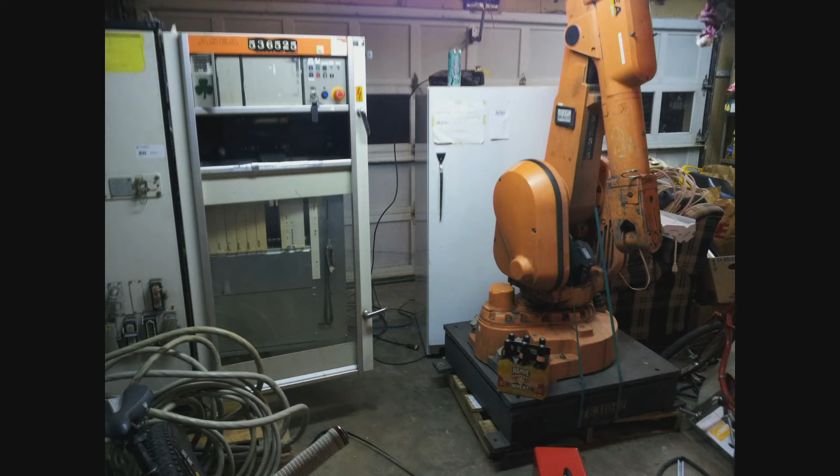So then on Valentine's Day, my welcome had officially been worn out at the plumbing company for having these giant robots sitting in the corner. So I rented a box truck with a lift gate on it and rented a pallet jack so I could roll this thing into my garage. And I started taking it apart. I was trying to figure out how it worked, what it was, what this crazy piece of machinery did.

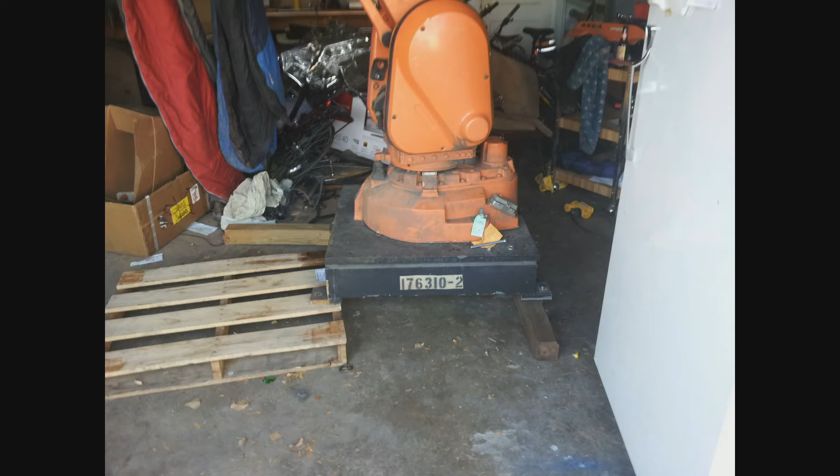And then I also had to try to figure out a way to get it off the pallet, using only the tools that I could afford at this point. And a bit of luck. So you can see there's actually a third one here. This is right before I slid it off the pallet and slid a bolt through and hoped it wouldn't fall down. And this was the celebratory beer and the pallet that had landed.

And you can actually see there's concrete dust around the corners from where loosening these bolts were slowly drilling into the concrete. Quick side note, that base is 1-inch thick plate steel. So the robot itself weighs 700 pounds. The base was easily another couple hundred.

So now that the robots were grounded, I was trying to figure out what to feed these things. What do robots eat? These robots eat 3-phase power. The City of Fort Collins wouldn't run 3-phase power to a garage. And even if they could, I wouldn't have been able to afford the installation cost. And so just like normal power lines, the three-phase power in my neighborhood was just out of reach. But it turns out you can fake it.

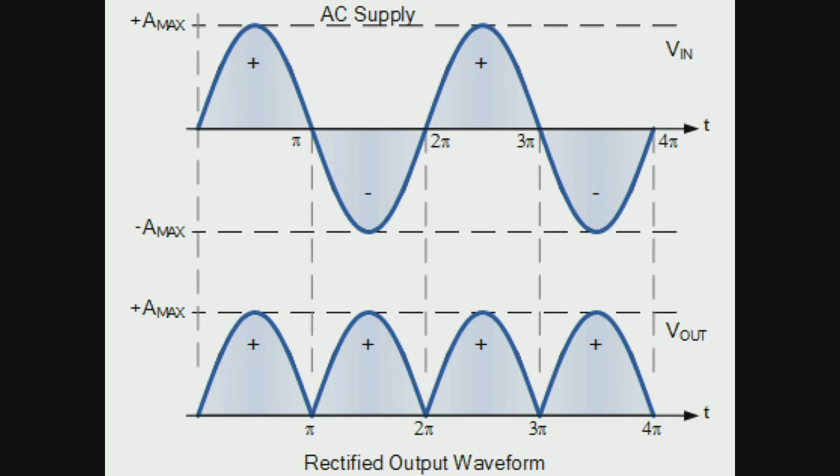But why would you want to? So if you look at the sine wave here, what you're seeing is standard AC line voltage from the wall, right? So if you're trying to operate a piece of big, heavy machinery, those zero cross points kill you, because at the point where the sine wave crosses the zero mark, you have no power available. So what that means is that if you wanted to run this kind of robot on single-phase power, you would need a tremendous amount of capacitive storage to get you through that dip.

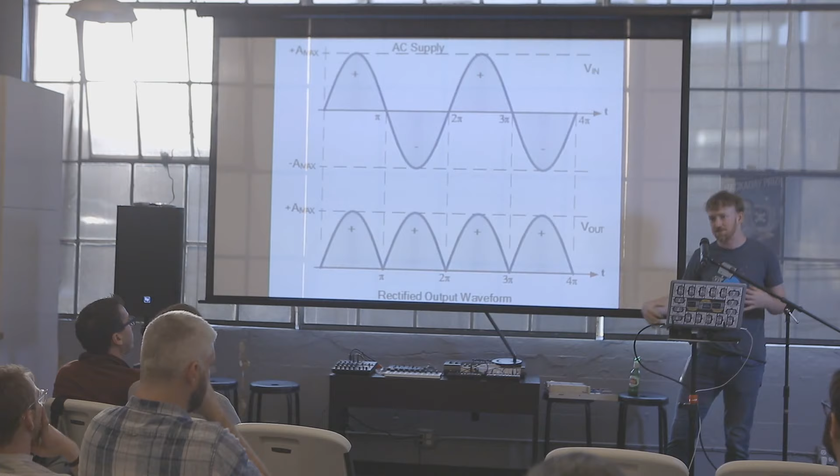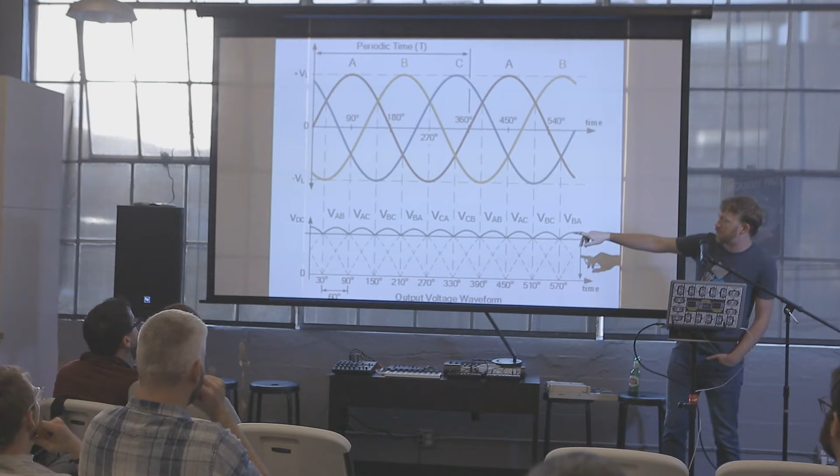So if you wanted any power in these moments, and the robot could move at any time and draws a ton of power as it does, you need something to get you through that lull. Three-phase power gets around this, because if you look at the full-wave rectified three-phase waveform, you can see that there's always power available to you. So this means that the controller needs less capacitive storage, and capacitors are crazy expensive, and they go bad.

So then I sold my motorcycle, my last frivolous asset, and drained the last pennies from my savings to buy a rotary phase converter. So a rotary phase converter, you send in single phase power basically into a three-phase motor. This is a terrible thing to do. This three-phase motor is about 7.5 horsepower. It takes 10 amps to run it. And so you are just burning energy turning this thing with like a gnarly waveform.

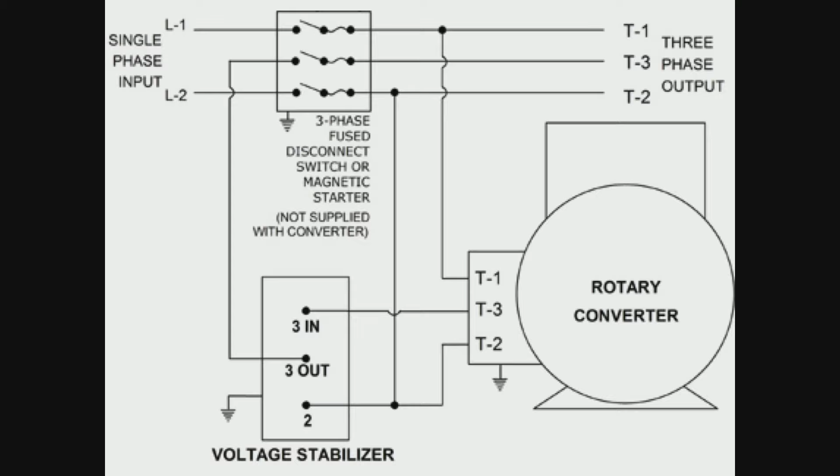But the idea is that you get this idler generator. So if you're trying to draw power during those lulls, you can actually pull off the rotor inertia a bit like a generator. And this lets you get through those momentary dips. So then I built a little contactor box. This is a very dark photo.

And now I had three-phase 220 in my garage, which was great because inside the robot, there was this giant transformer that had a ton of taps, like 30 taps across the top. So what are the odds that there's not a tap that I can run 220 into this thing? And even though the nameplate on the robot says it runs on 475, I thought I'd be able to swing it. So I did what any reasonable person would do, and I called the 24-hour ABB hotline.

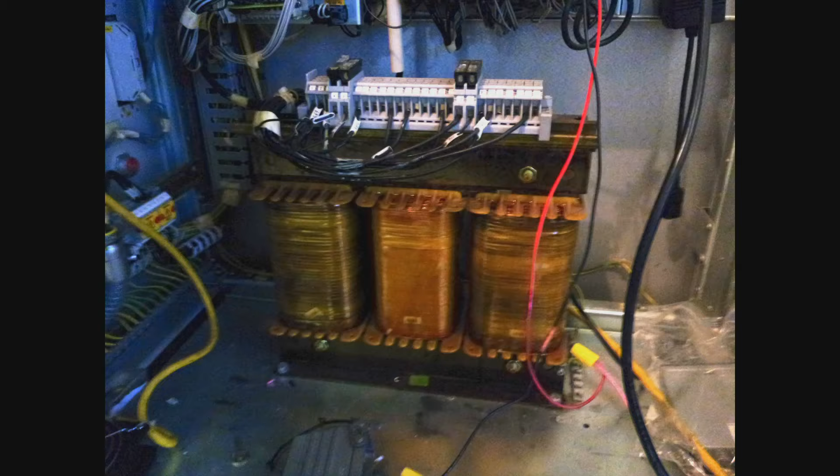I told the poor on-call engineer on the other end that I needed to move this robot across the factory, and someone had disconnected it, and I didn't know where the taps were, and I needed to get this thing back online. And he's like, okay, hold on, let me go dig some of the old manuals out of storage, because this robot's from 1987. So they're not used to getting these calls. And he called me back with some bad news.

All of these taps are designed to take in anywhere from 400 volts AC to 600 volts AC three-phase. And a step-up transformer for three-phase is really expensive, like $500 to $1,000 used in an unsure state. But luckily, there are salvage wreckers in the world who are heroes. There was an amazing toothless guy 3 hours away who had found this, which I give him credit for, because had you found this and survived, that means that it was probably on a building that wasn't powered. I paid $75 for this.

Him and his buddy helped me load it into the back of my Honda Civic, and it took about a couple days for my friends to come home. They were out of town at the time, and I couldn't get it out of the trunk on my own. So this is a 9 kVA transformer; the high voltage side is 480, low voltage side is 208. But one of the wonderful things about transformers is you run them forward, you run them backward. So I put in 220, I got about 470 out.

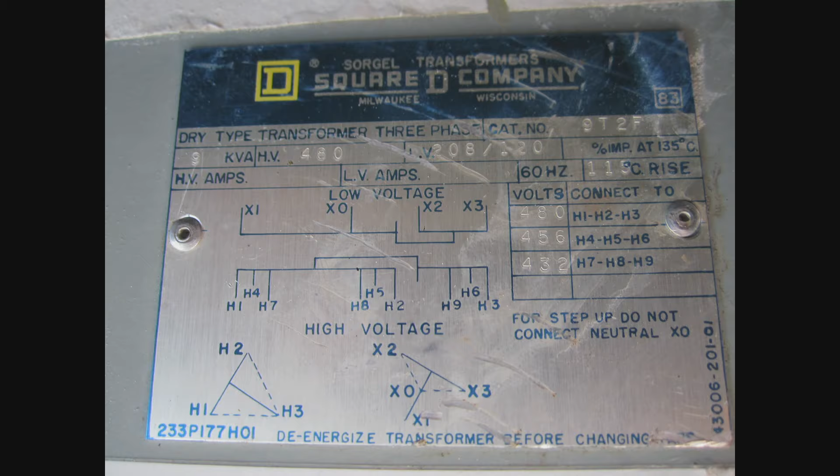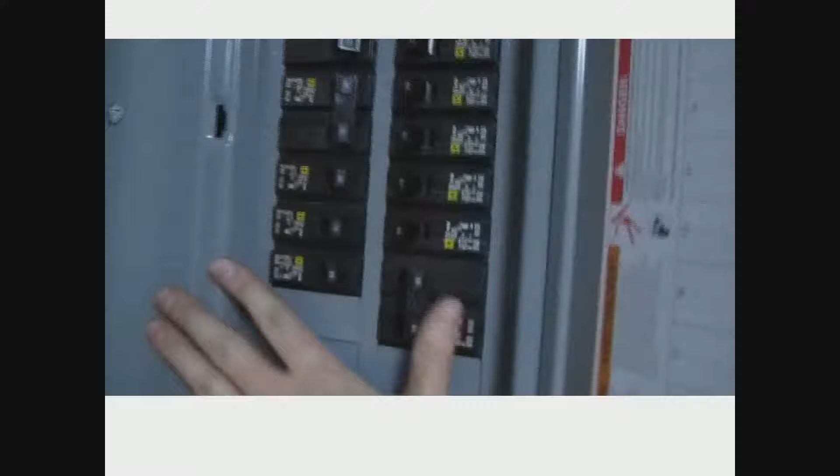So then with everything in place, we threw the breaker. Oh, wait. Oops, sorry. Light on, phase converter. Up to speed, sounds good.

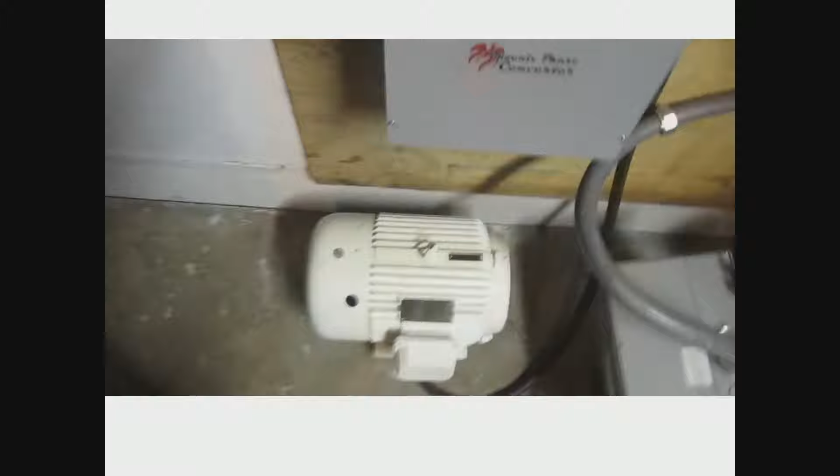Transformer activated. Dun, dun, dun, dun, dun, dun.

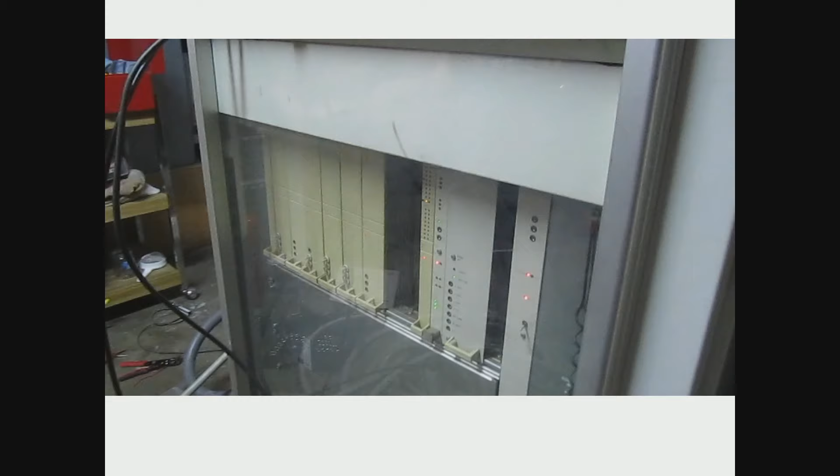Oh, we have lights. Yeah. Oh, shit. Oh, sorry, I was swearing on the radio. Okay, yeah, sorry about the shakiness. I was very excited. I was also like terrified.

And then this was the first message from the robot. So it took almost a year, and it said 510 system error right after that, which meant that there was an issue with a 300-volt supply. So great, we had all the power up, we turned it on. Turns out when people sell things in unknown condition, it can be pretty bad. So the power board needed some love.

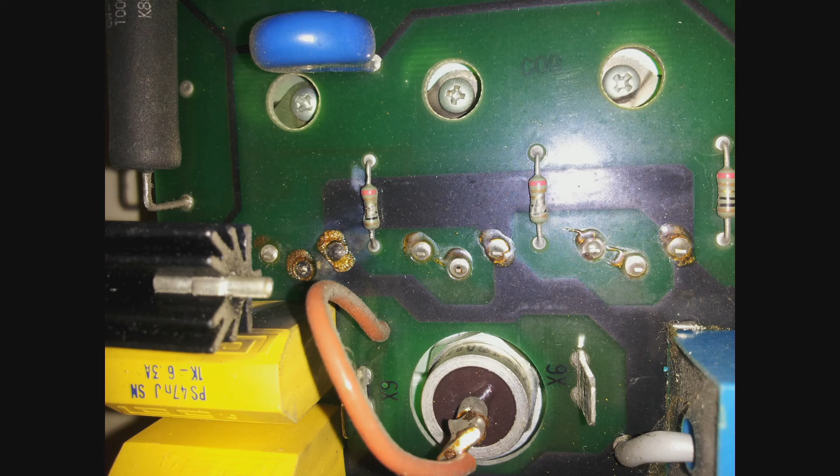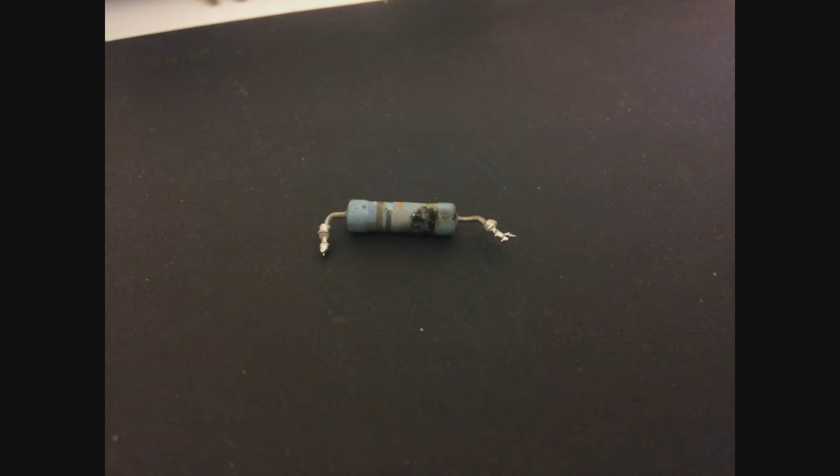You can see that on the right, there's a component that's just totally missing. There were some legs fried off of other things. Some capacitors. It's sort of hard to see in here, but this is just blackened on the left-hand side. This resistor had a hole physically blown through it, which is pretty cool. So then I just removed a bunch of the monster components, just testing things as you do.

Some of the big capacitors, these are the size of a pint glass. And you can see around the negative terminal there's some corrosion from where the electrolyte may have leaked out. So put a little 1K resistor on it. I should say at this point in time, my only piece of test equipment was a Harbor Freight multimeter.

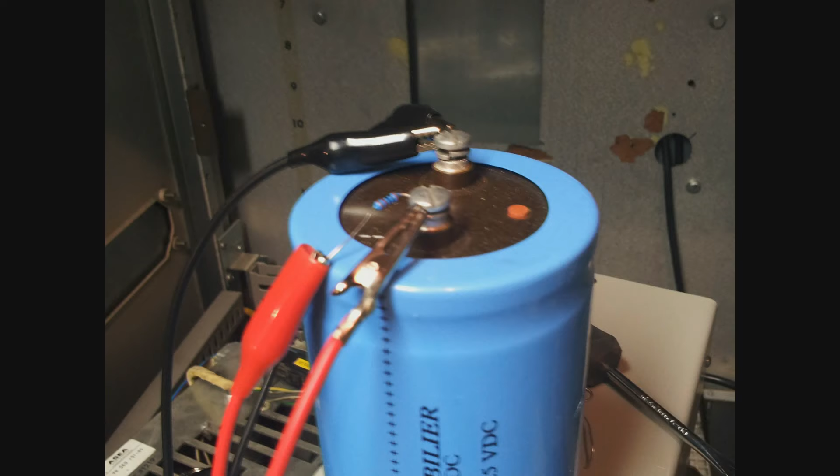So to test a 350 volt, 3,300 microfarad cap, it needed just a little RC circuit. So yeah, I just used a multimeter and a stopwatch. Turns out all the caps were fine, as far as I can measure. So then rebuilt the board, put it all back together, and then it was time to fire it up again.

I just heard a sound from... That was a huge pop. I saw a spark. So when we fired it up for the first time, got a little bit of an arc flash inside the cabinet. And a new message from the robot, 506 servo error 2.

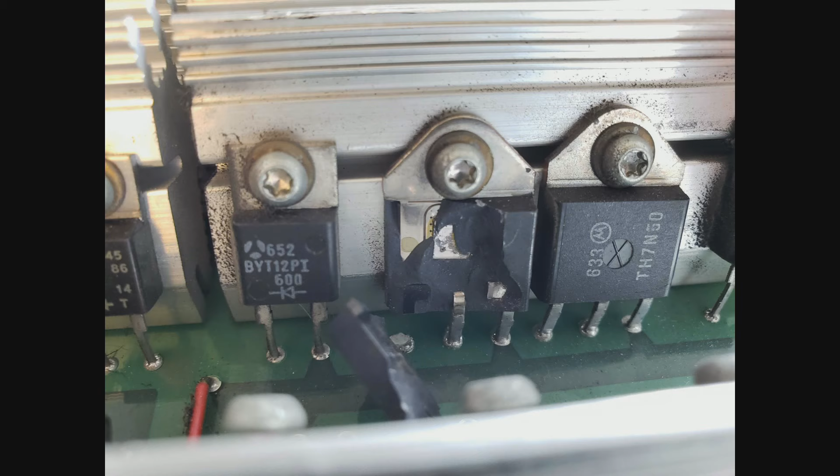A couple of the transistors had physically blown themselves apart. This is a 500 volt, 7 amp continuous, 40 amp peak transistor that had blown itself in half. And you can actually see it. You can pass around some pieces of cool robot brain.

Yeah. What's cool is on the back of that board, too, you can see there's this channel, sort of like on Mars, so you can see where the rivers used to be. You can see where one of the copper traces were. And it actually deposited this fine copper spray paint on the board behind it.

I also promised to talk about transistor matching. One of the cool things is that, in 1987, these high-power transistors are extremely expensive. So they did a lot of binning to actually match transistors. And so you can see that these guys are actually in parallel. And as you look at that board, you can see everything is like a matched set.

So whenever you're doing transistor matching, that little half micro ohm difference between 2 transistors can make a huge difference as one is heating up faster than the other, which is actually why you can see one of these is just fine and the other one had a really bad day. I also built a transistor matching spreadsheet as part of all this, so if anyone wants to check that out, you can send me an email, I'll send it over.

So I realized at this point that Fred wasn't going to move anytime soon. Actually, if you look at that board carefully on the top, there's a big Sharpie X on it, and I didn't put that on there. So this robot sold in unknown condition may have been a bit bad.

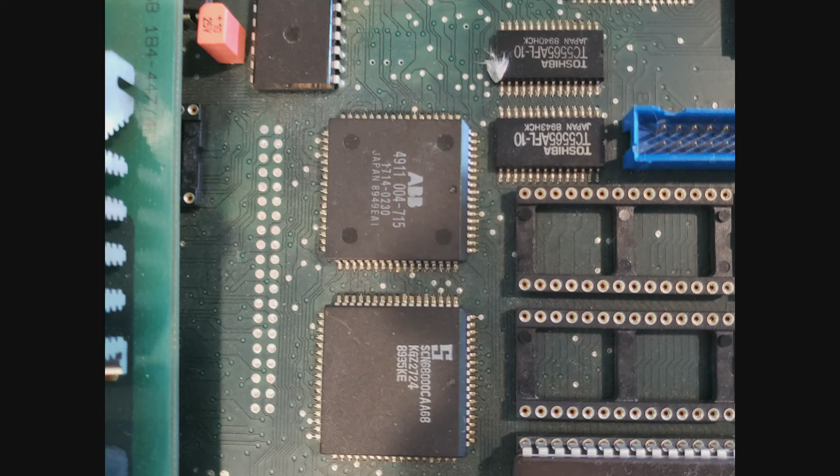So Fred is also filled with ASICs. So I'm going to pass this around. This is Fred's brain. This is the main processor board for the robot. So what? Oh yeah, 1987. Yeah. That was the controller. I'm not sure if anything on that had been upgraded since then.

So there's a few people in the Hackaday community who decap and figure out how ASICs work, the amazing Tamagotchi work. But I'm not that person. And I was very worried that I would go and spend a couple $100 fixing the transistors on this board and then blow an ASIC and never be able to get it moving again.

So with Fred just kind of standing guard over the bicycles in the garage, I kind of did what any sane person would do in this situation. And I rented an engine hoist, turns out the right tool for the job here. And I also rented a truck, and I acquired another robot.

And moved into a warehouse in the industrial part of town. I called it the warehome, which was great because my neighbors had forklifts now, and they were more than happy to let me borrow them to move these weird robots around.

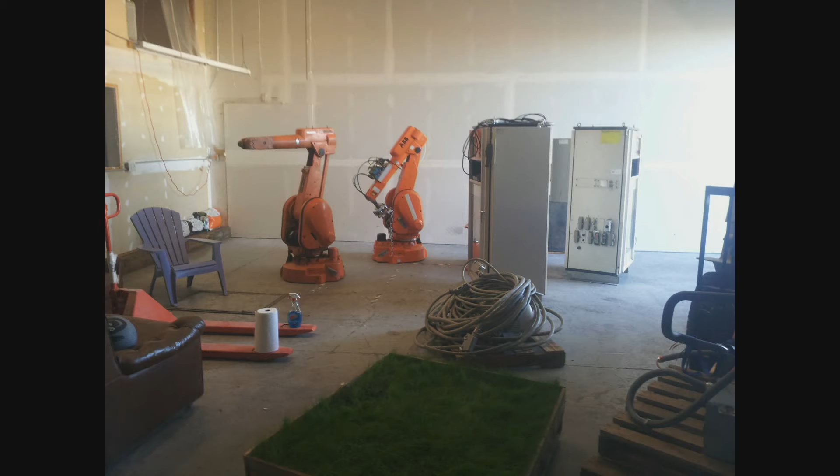I also made like a little bit of grass. It's kind of hard to see in this photo, but you know, there were no windows in here, so I thought a little patch of grass would be nice. And so that was the robots in their new environment.

And the other thing was, during this time, renting a warehouse was pretty expensive, even though it was out in the industrial part of town. So I sublet the space next to the robots to some friends of ours who were starting a food truck that sold sausages. So during this period of my life, I didn't go camping because everything in my life smelled like sausage.

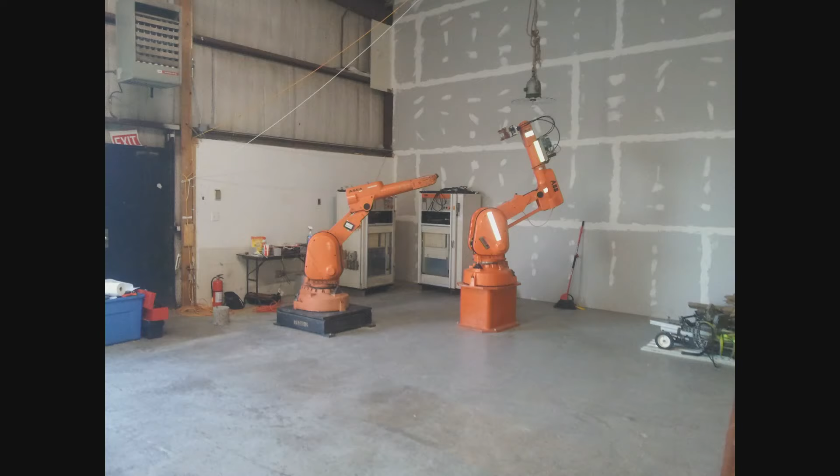So this was me bolting the robots into the concrete. I also got the landlord to pull a 100-amp service of 220 into the corner. And then, yeah, this was measuring it out and landing them. And then this was them actually planted into the ground. So, like, economies of scale, I think, come to mind, but I'm not sure what that means.

So LEFTY is this newer robot here. LEFTY is from a Kodak packaging facility where they used to handle X-ray film, and so it's like brand new. It was in a clean room for most of its life. Its controller cabinet smelled like a new radio. And then Fred was pockmarked from welding and just totally beat up. He spent his life at a Pratt & Whitney jet engine manufacturing facility welding.

So at this point, I was like, okay, I'm probably not going to get these controllers working again. So I started to try to figure out how they actually work. And I was realizing, too, that trying to hack into a serial port on a set of controllers from 1987 that may have been missing the feature they sold for comms in the background wasn't going to let me just set arbitrary positions and speeds. And then, if I did get it up and running and I blew an ASIC or the comms port went dead, it would all be moot.

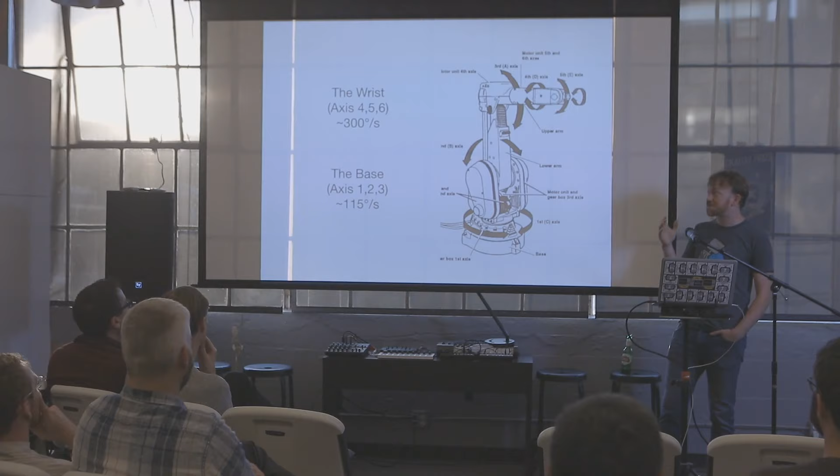So what are these robots? All they are is 6 servos held together with an aluminum casting and some gears. So another representation of it just as nodes and joints. But these are pretty monster servos. They can really rip 300 degrees per second on all of the wrist axes and 115 on the body. And this is especially impressive when you consider that the arm itself weighs 700 pounds. And on top of that, these gearboxes recommend an oil change only once every 5 years of continuous operation. So they're built extremely well. They're like a Swiss watch.

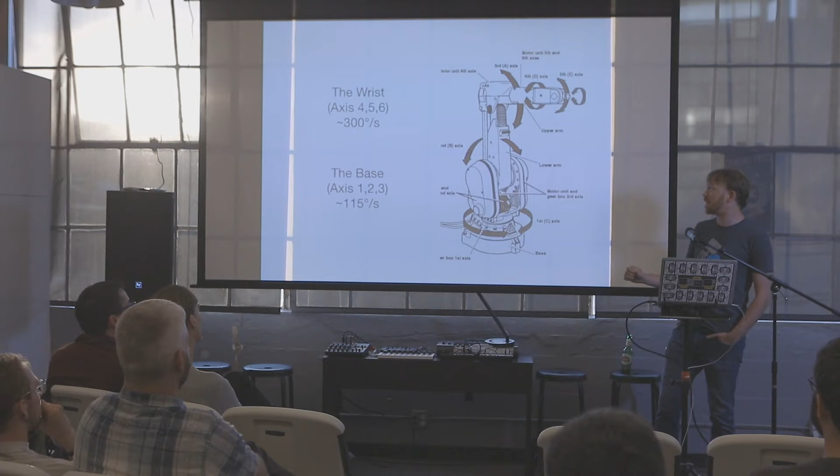And all these castings are enormous, too. So this robot has a 1.5 meter reach. And this is actually a slice because it rotates around the center axis. So there's a sphere that it can move in. And one of the coolest things about this is it can reach down below its base.

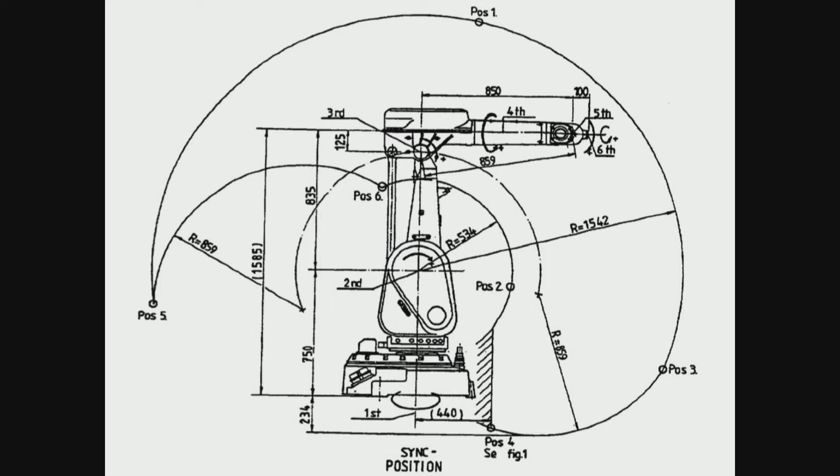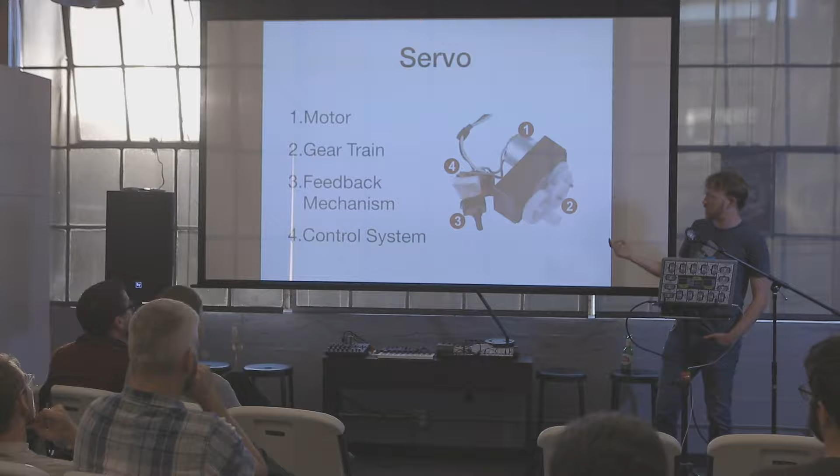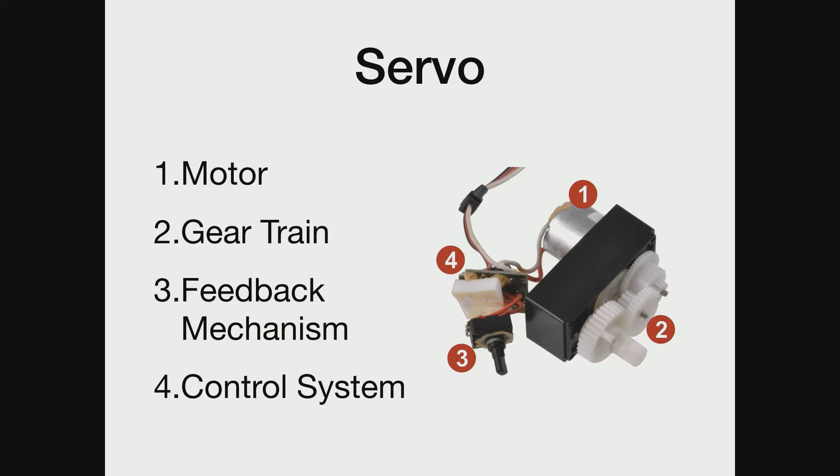If we take a step back and just talk about what a servo is for a second. Inside a servo, just a little hobby servo, you have a motor, gear train, a feedback mechanism, and a control system. So in this case, it's a DC motor, plastic gear train. There's just a potentiometer on there. And then the PCB is the controller, which takes the pulse width modulation you're sending in to generate an error signal that controls the motor.

But if you want to spin more than 360 degrees, you're likely moving to something like an encoder. So a rotary encoder is an optical device, and it will generate a pulse train based on the direction of rotation. And so as the shaft rotates, your code wheel will move, generating this quadrature signal on the output. You can add a bit of information to that, which is a home point.

And so once a rotation will get a note as sort of a source of truth. You can go a step further. So this is a code wheel for an 8-bit encoder. So anywhere along here, you can have absolute position knowledge within one rotation to a resolution of 2 to the 8, or 256 positions.

You can go even further. These are 16-bit off-the-shelf encoder wheels, which it's a very high shelf. They're extremely expensive. But they're great for stable, clean applications, anything you need precision motion again and again. But the problem is these are glass usually at the higher rates, or they're made out of very thin metal, so they can be extremely fragile.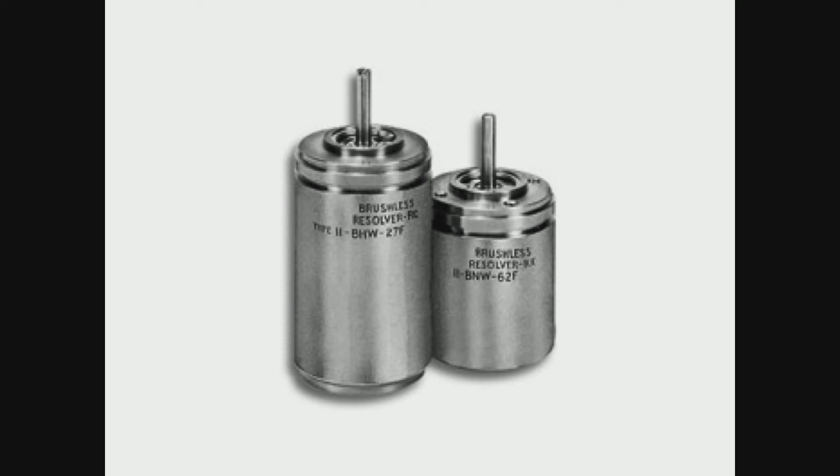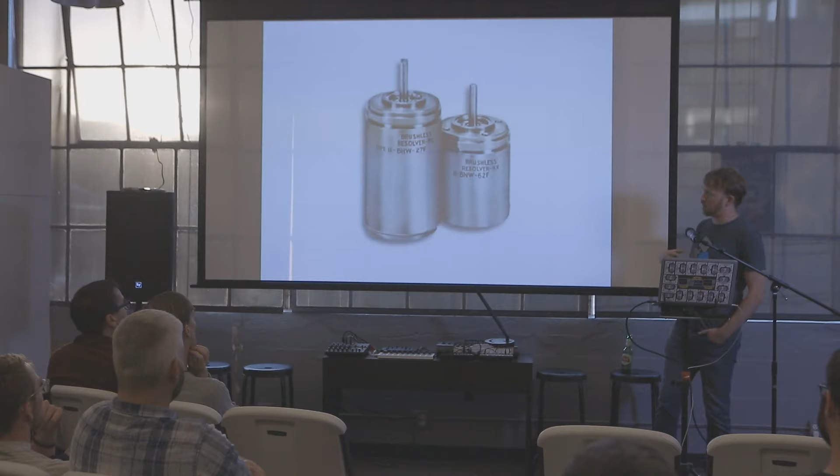So for a higher vibration environment, I present the humble resolver, which is a weird piece of technology that I had never heard of, at least. So in a high noise environment, like on a rocket, for the thrust vector controllers, or for a robotic arm, these are one of the coolest little physics packages that are out there.

The way it works is you have a center coil, which you excite with a sine wave, and then you have effectively a sine and cosine that you pick up off the outside of that. So as you excite that center exciter and rotate it within that stator, you can see these signals changing on the output.

And then with measuring the magnitude of those signals, just a little bit of simple trigonometry to figure out where your rotor position is. So these analog position sensors have the fascinating trait that the resolution is only tied to your ability to generate and measure sine waves, which means that their resolution is theoretically infinite. It's just...

And what's also ridiculously cool, since the center exciter is actually generating a magnetic field, and this thing is spinning at high speeds, what you can actually generate is a generator. And so you get this DC offset in your signal because you have a rotating magnetic field within two coils. So you've built a little tiny generator.

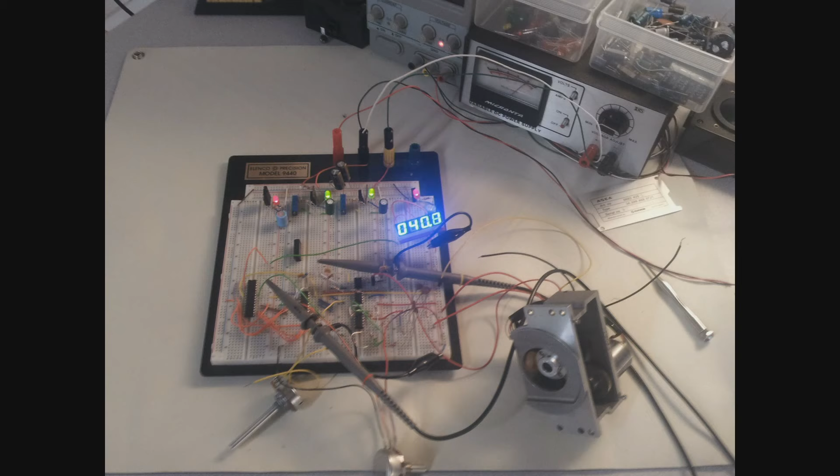So then I added a little controller to calculate it, and I had sort of a position sensor from one of the axes. And so this is the resolver package from axis 4 on the robot. An interesting side note, Fred was the low resolution version of the robot, so it just had one resolver per axis. And so you had to bring it back to a home position, but that still gave it sub-millimeter precision anywhere within that 1.5 meter sphere from its base.

What's amazing is LEFTY, the other robot, had 2 resolvers, one with a 90-tooth gear and one with a 91-tooth gear. And so the 2 resolvers are out of phase, so you power it up and you have instantaneous position knowledge. Because anywhere within that space the robot can travel, you'll never recreate the same phase offset between those 2. It's a really amazing tech that was put in 1987 and is still absolutely bleeding edge, state of the art.

So then I was super excited to figure out what was happening, and I opened up more parts of the robot, and it turned out the next thing I opened up was a gearbox. And it had never even occurred to me that this giant robot could be filled with oil. And so I open this thing, it just starts drooling gear oil all over the ground.

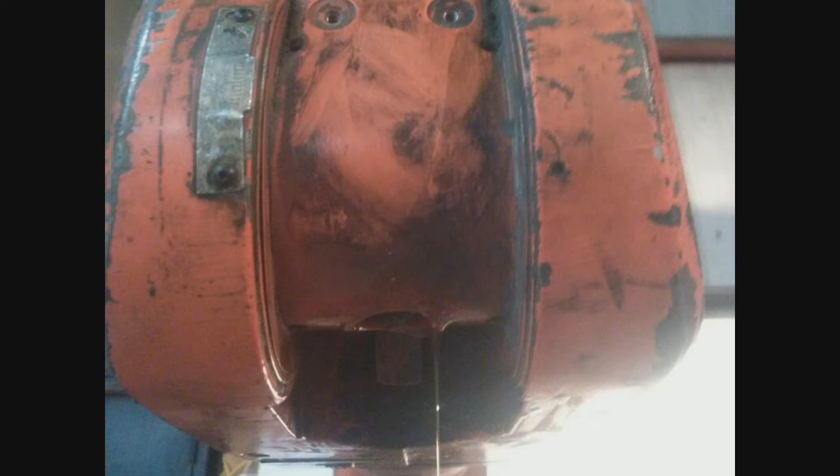And at this point, I picked up a set of old manuals for the robot, and I found the exact gear oil specification I needed, and I went to every auto parts store, every distributor I could, until I finally ended up at a Shell distribution station, and they had the oil I needed, or one of the 8 options. But it turns out they only sold it in 5 or 55-gallon drums.

So I bought a 5-gallon bucket of robot oil. This should be enough for 90 years of oil changes on the robot, if they're operating 24/7, which they're currently not. And that's also on an aggressive preventative maintenance schedule.

Since they're not moving all the time right now, if anyone needs some robot oil, I got some. Happy to share.

Once I got the gearbox refilled, I decided to take another crack at getting the robots moving again using these old controllers. So I just started pulling ROM out of one of the boards. So that board is actually like half made up of ROM from one robot and the other, and there were cards sliding back and forth between the two and all sorts of chaos.

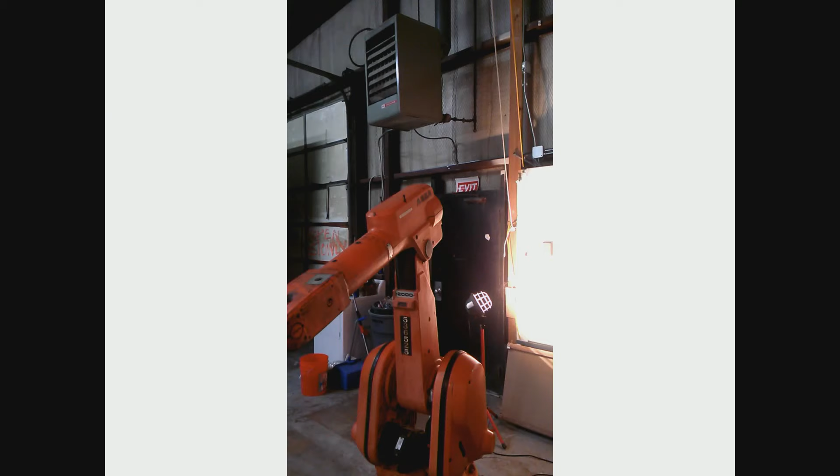And then, in the middle of the night, I don't know why, it suddenly started working. And so this was the first motion of this robot that had been sort of kicked around from storage sites and moved. But you can hear this 700 pounds of machine, and it moves just with that little 4 kilohertz hum.

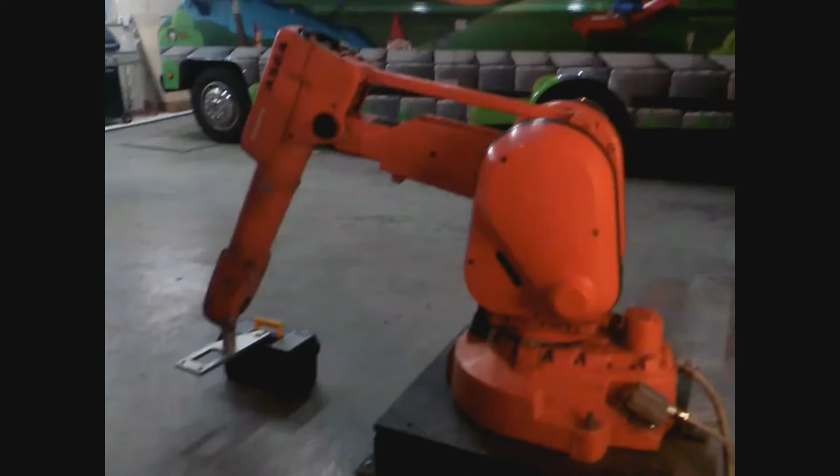So I was over the moon, but I didn't quite know what to do with this newfound ability. So I was trying to just make things up. So I had it picking up toolboxes, which wasn't super exciting, but it was kind of fun.

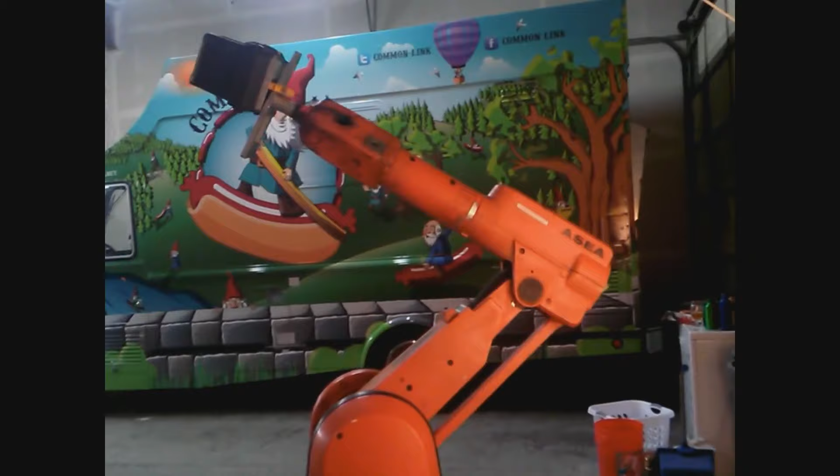Oh, that's the sausage truck. Yeah. Yeah, it was pretty nice. Common link. Oh, and actually, oh no, it's good.

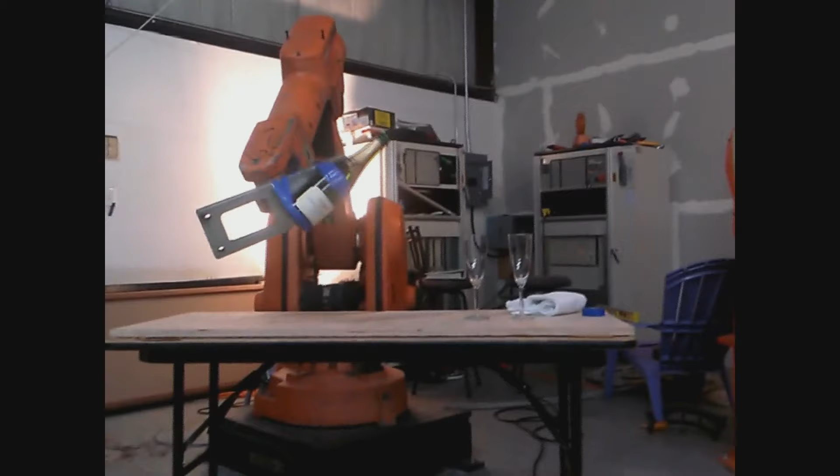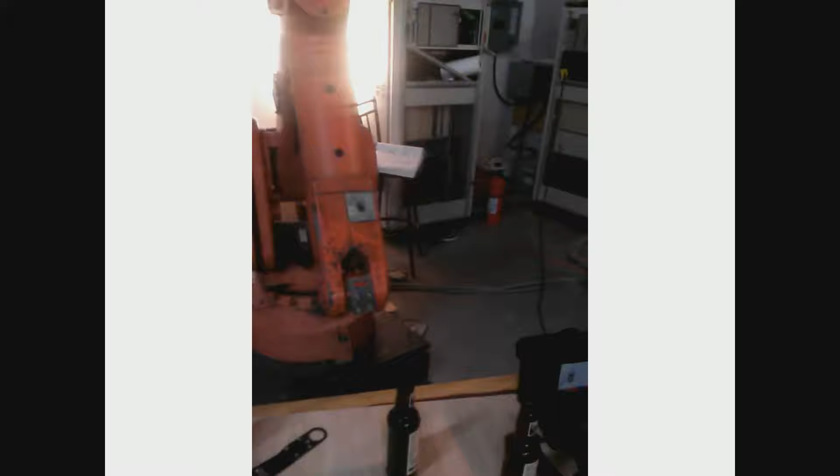But then I had it pour some champagne because I was like, well, that seems like the right thing for a robot to do. It's pretty great. Then I had it open beer bottles. So at this point, I had effectively built a tiny bartender. But then I just started making it go faster and faster.

So once again, the thing to keep in mind with this is 700 pounds. So if you started this up and there was a trash can or something around, it would just knock it clear across the warehouse. Most industrial settings have light curtains and cages, and I just don't think that's a proper way to store such a wild creature.

But then I put a bike light on it, and I turned the lights off, and I started doing some long duration photography with it, which I just thought was the coolest. And then I added a whistle thing that I found on Hackaday a while ago. And so then I would whistle, and the robot would come, and I would whistle again, and it would go away.

So the dangerous thing about this, though, is I am very happy just in general. My personality is one to wander around whistling. And so I would leave the robot on, and I would start working on something else. I'd just start whistling, and then this thing would come whipping across the shop, which was probably not a super safe thing.

So then I was like, okay, well, this robot is actually from before ABB. It's from ASEA, which was the A in ABB. And ASEA has a very tragic logo. And if you ever want to look that up, it's not good.

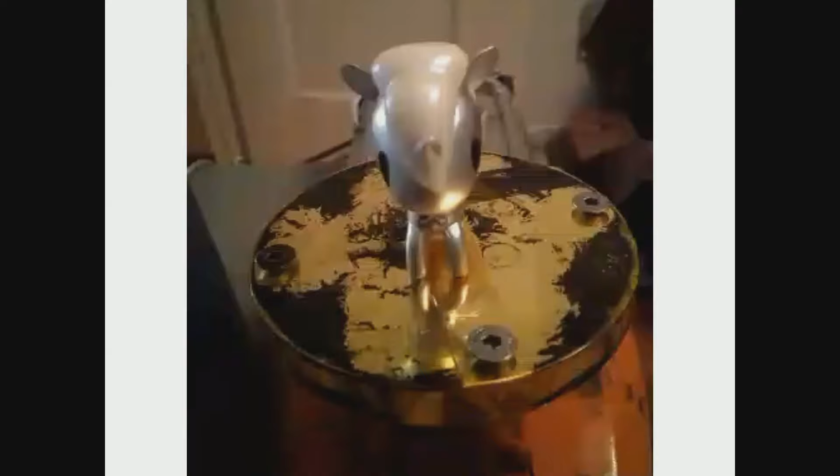I decided that instead of doing like a microcontroller-based thing and building off of these other libraries that exist, I wanted to write the entire thing from scratch in VHDL on an FPGA, including all the PWM blocks and everything. So this was some VHDL ModelSim outputs that were then running the first open loop test here of the wrist. Eventually moving on to little 40-volt tests.

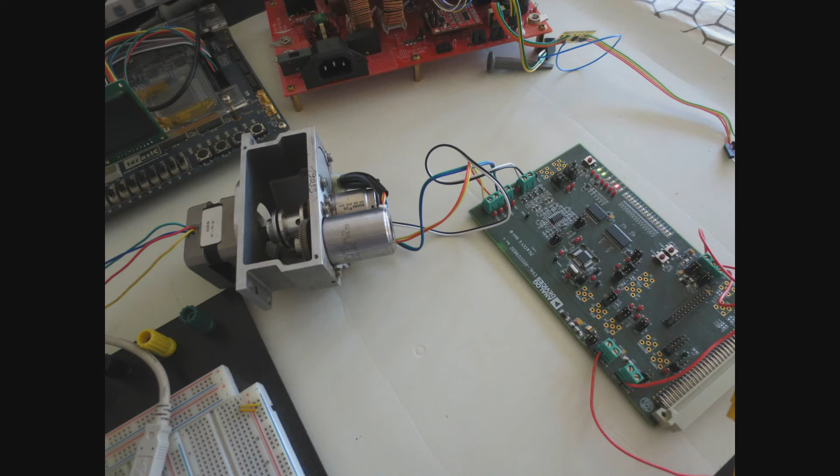So you can see this sort of going back and forth here, but this is totally open loop. And then it started getting a little bit more aggressive. And I decided that I would start moving on to the closed loop testing. And this was a resolver to digital converter board that ADI sells. But actually, what's more interesting is in the back here, there's this red circuit board.

I wrote a Dear Santa letter to Analog Devices. This dev kit was about $400, which I didn't have the cash for. And so I said something along the lines of, Dear Santa, just straight to Analog's main contact page. All I want for Christmas is the ADP 104080 Val-Z. And I went on to explain about the robots and what I was working on.

And I ended the letter with, well, some say that the magic is gone from corporate America. I still believe. And I was a little bit drunk when I sent this message. And I heard nothing back for a couple weeks, which is totally understandable. And then someone from Analog accidentally forwarded me the entire chain, and it went all the way up to some VP of marketing who was just like, don't bother me with this, just send the kid the dev kit.

And so then I got this response from them saying, yeah, send us a shipping address, we'll get it to you right away. But they ended with, if a real customer needs it, we're going to take it back. I was like, all right, that sounds fair.

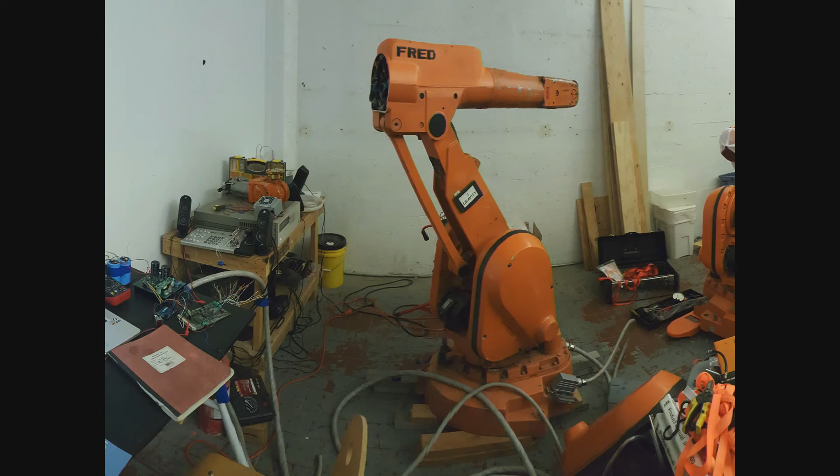So then I went and found a warehouse at 6th and Mission that was another windowless place, which I don't recommend living in, and got a box truck and road tripped these guys out to San Francisco. And so, yeah, another windowless, unsanctioned living situation brought on by having these giant robots, my mechanical friends.

And so it always gives me a little bit of eye roll when people are like, I can't find a place to live in San Francisco because they won't take pets. And I'm like, yeah, that's a bummer.

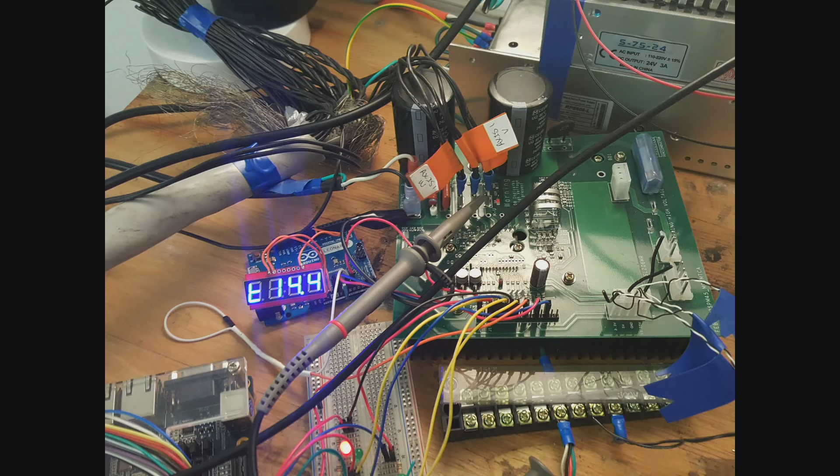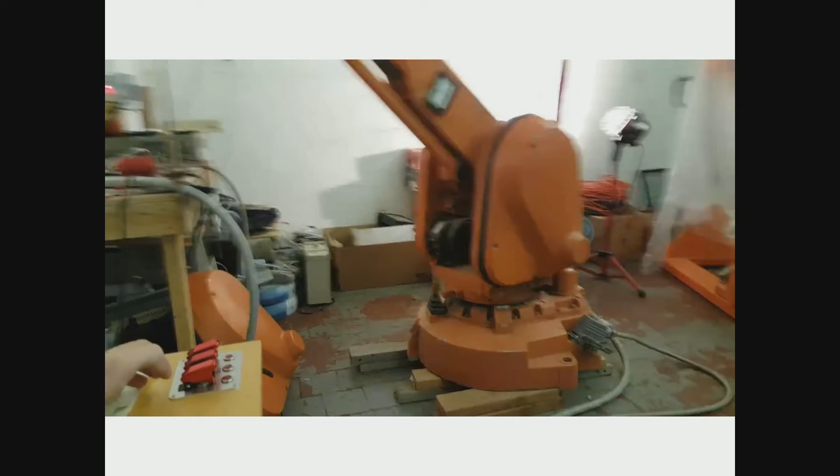So then I started getting the closed loop test set up, just all sorts of crazy circuit boards wired to other things. You can see no shielding on anything, just lots of noise. But then it started working. So I got one axis of closed loop control up and running. But then the landlord of the crappy warehome decided that it would be much more profitable to be Class A office, and they kicked us straight out. So then I got a shipping container over in Hunters Point, which is where they're at now.

But at this point, the entire project sort of pivoted into a software problem, which brings me to the next part of this. What I love about this project is it continually reminds me that I know absolutely nothing. So this is the only useful part of a sine wave, which I hadn't realized before. And so if you're using anything more than this much in your lookup table, you're just wasting memory, which seems like something I should be optimizing for.

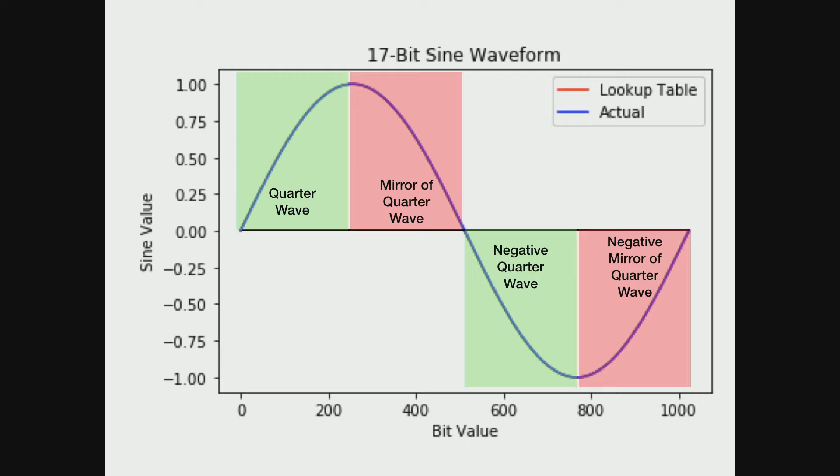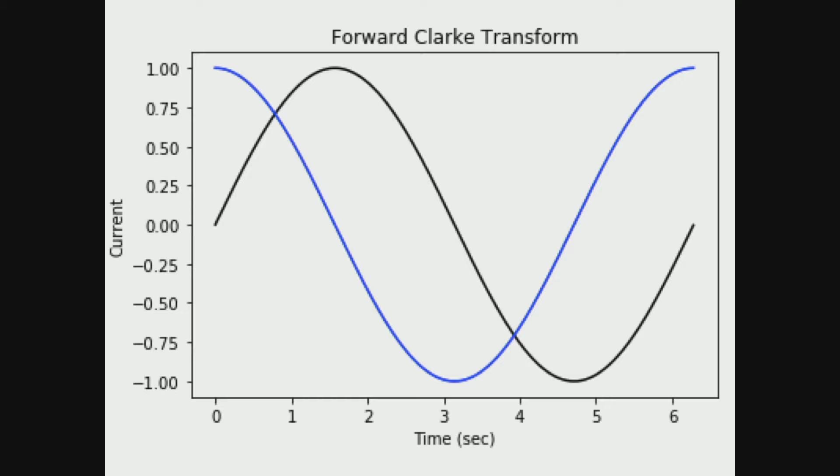So if you look at an overlay of a sine wave, it's all just that same information mirrored. And then what you can do once you have that quarter wave lookup table is generate three-phase waveforms. So this is a three-phase waveform generated from that quarter wave lookup table on the FPGA. What's really interesting about three-phase waveforms is they can actually be expressed as just two sine waves. And this is called the Clarke transform. And then from that, you can also do another transform called the Park transform. And what you actually get is the entire three-phase waveform expressed as two DC components.

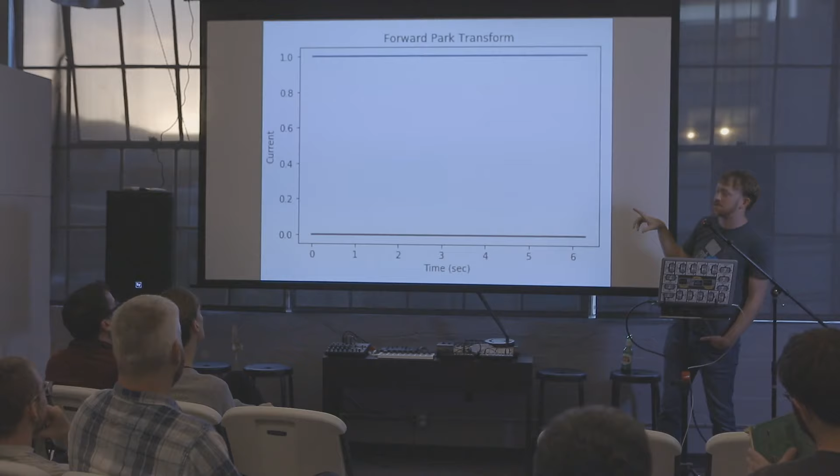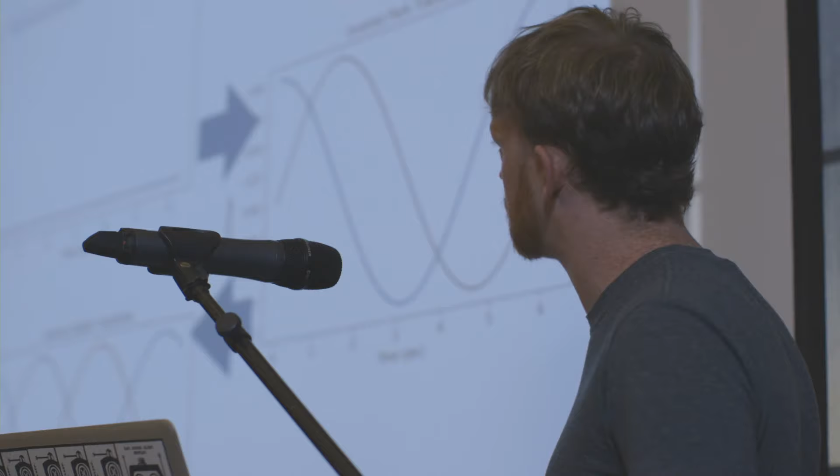And what's really interesting about that is if you're trying to control anything, if anyone's ever run a PID loop, it's a lot easier to send in a DC signal than it is to send in a three-phase waveform. So this is called field-oriented control; it uses this theory a lot. And there's some amazing videos by Dave Wilson out of TI that I highly recommend if you start going down this rabbit hole. And then you can run it all backwards, and so from that, get into a three-phase waveform again.

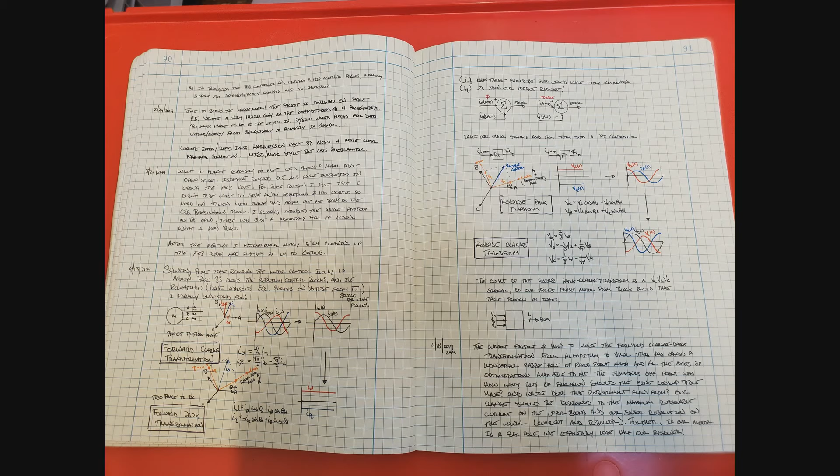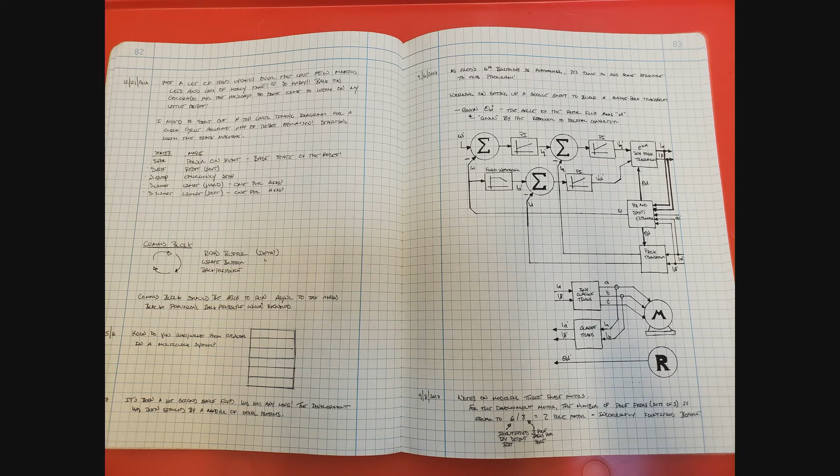And so basically, I can't recommend highly enough picking up a pair of these robots. At least one. It's logistically difficult, but the barrier to entry is a lot lower than you might expect. As these systems become obsolete, as factories upgrade, as factories close, there's more and more of them on the market, and people are going to start hacking away on them.

There are crazy scrappers out there who are selling just pieces of it. I got this for $70. Other people are selling it for $1,900. They're selling that busted piece of circuitry we're passing around for almost $500. But then there's other places on eBay where you can get the entire robot, a controller that's filled with all of these parts that we just saw, for $1,000 or best offer, because they want to get rid of this thing. They're being sold for basically scrap value.

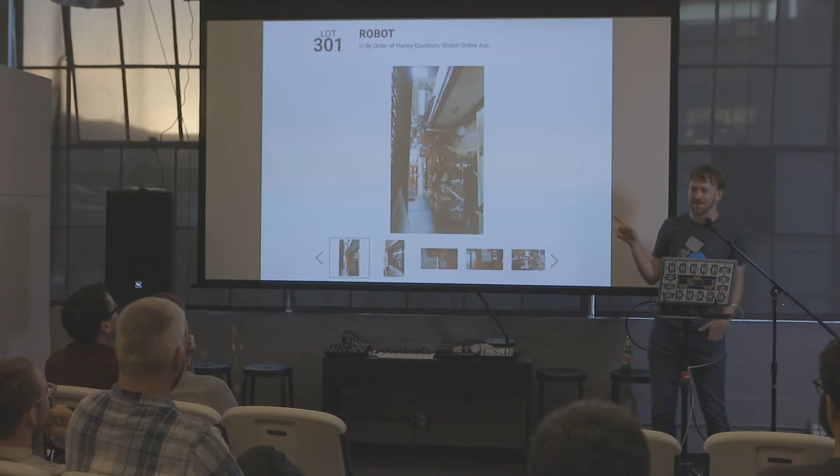This is a gantry crane with 2 inverted ABB 2400 arms on it, and all the controllers to run the whole thing. This was in a factory in St. Louis, Missouri. The opening bid was $25, and I was the only person who said I was interested in bidding on it. But then I talked to the riggers, and I tried to figure out whether this would even fit in a 40-foot shipping container broken down, and so I ended up not buying this.

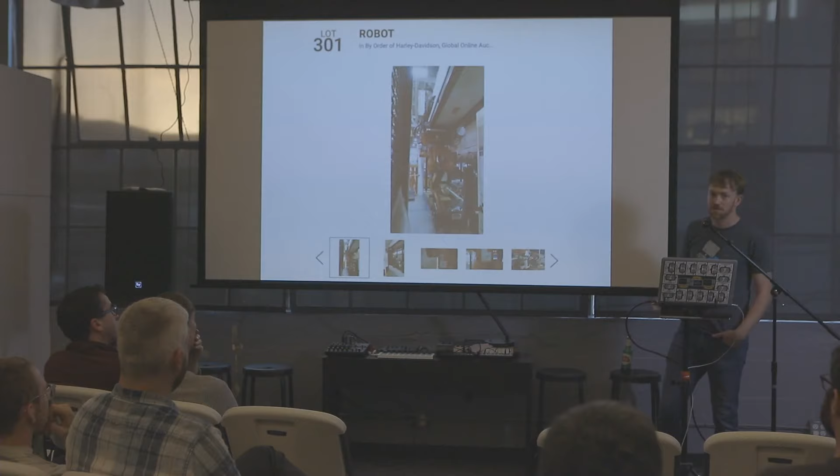But at that same auction, there was another dozen lots that had KUKA and ABB arms that were starting at $25 with almost no one interested in bidding on them. Mostly these things are going to scrappers because there's so much aluminum and copper in them. And there's also some that are just abandoned. This is a factory in the UK where they have just a stack of these robots rusting away.

So, sort of in conclusion, working on these things has been an absolute blast and a constant learning experience. I sort of look at them as my '69 Charger. It's that project I'll constantly hack away on in the garage, and it has no timeline and a seemingly endless budget. Thanks for the attention, and I implore you to start your own home for broken robots and start building a weirder future with me. So, thanks.

Any questions? Yeah, we got questions? Did you have some purpose that you were going to do with the robots, maybe in the beginning? Yeah, so the initial goal was to teach them to make a mojito, like slicing a lime. The cool thing is when they park, you can park them in any position and they draw no power. So you could actually have them watering a plant, becoming a lamp and then setting the light down, watering it, taking it back, and then just parking with no power.

But the real long-term goal is I want to mount 2 of them upside down on a roller coaster track inside a greenhouse and have them just tend to the greenhouse. So that's the...